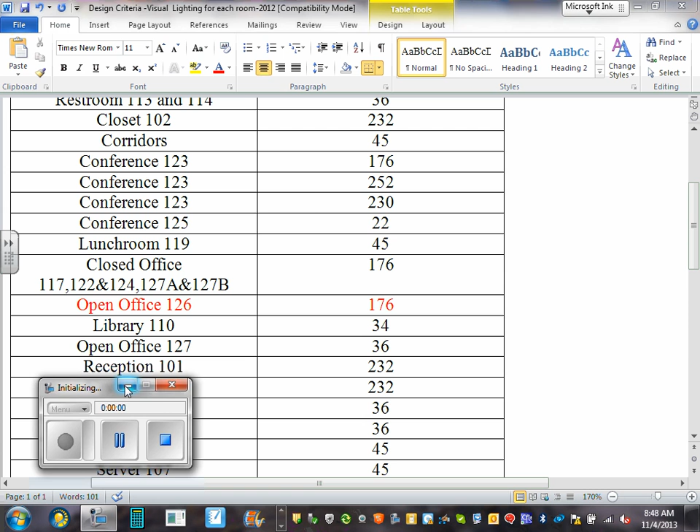Got that one. So here's the fixture. It's going to be page 176. We got that one. It's going to be a linear indirect light T5HO fluorescent.

Now, when you guys go to that fixture, here's what I just downloaded for you. Here's the fixture, that's from online. If you go online, you should be able to find Lithonia. If you go to the Lithonia website, Acuity Brands, if you go to Peerless, it's a Peerless fixture. If you look at the side here, Adam, right here, it's a Peerless fixture right on the side.

All the fixtures that we're using, guys, is from Acuity Brands. Here's the fixture. What does it do for living? Here's how it looks like. Can you guys see that?

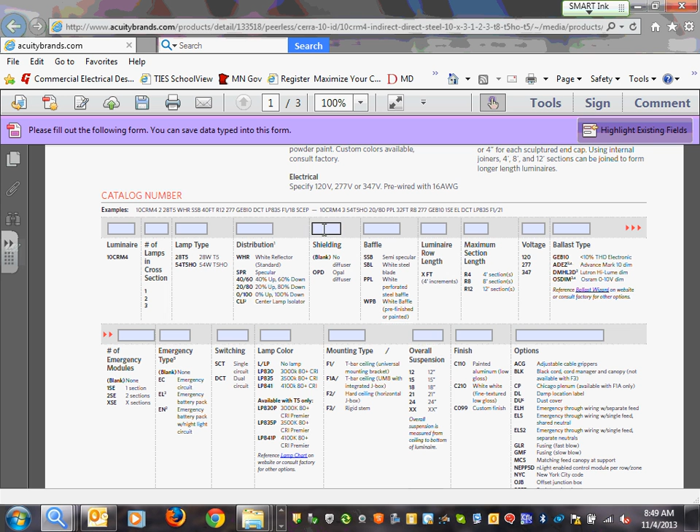It's direct indirect light we're going to be using. Here's the catalog number, how many lamps you can use in it. We're using a T5, can you guys see 28 T5 right here? Distribution, different distribution patterns and shields and what's not, voltages and what's not. You can pick the catalog number here for that particular fixture. But that's a fixture that we can use.

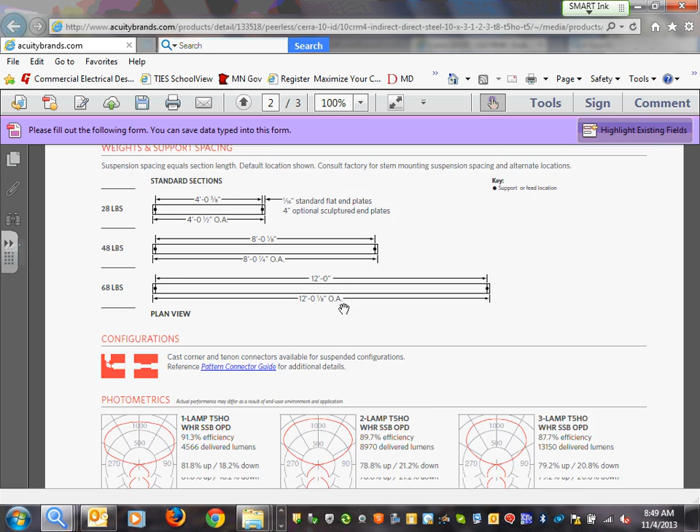You can have 4 feet, 8 foot and 12 feet. It looks like some of these fixtures, they come. Here's the distribution pattern. Matthew, remember just a second ago we were talking about the distribution patterns up and down. This is how this fixture, depending on how many lamps you guys use, shoots light up and down.

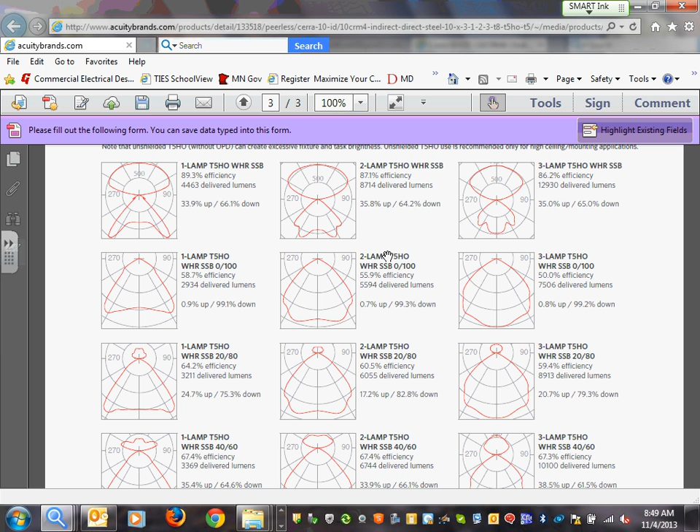Can you guys see that distribution pattern for this fixture? So when everything is done, you guys are supposed to print this one, make a hard copy for Chad, and put it in your portfolio. That's your cut sheet for your lighting fixture. So I just grabbed that one for you. They're so easy to find, all of them are in Lithonia. If you follow the book, it's so easy to find, guys.

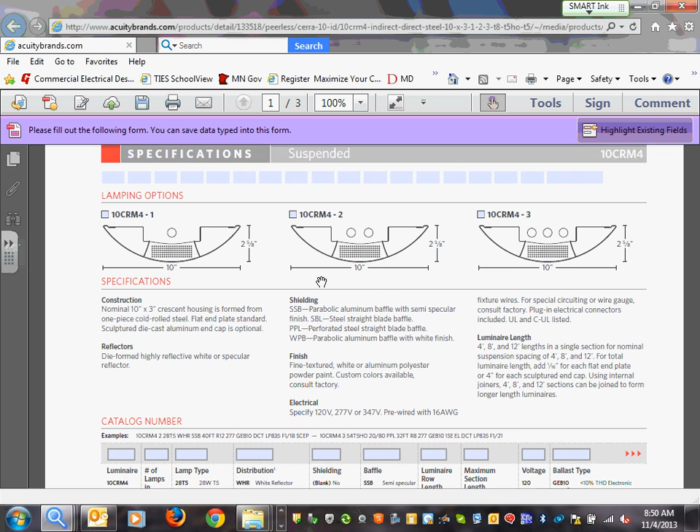Very, very easy. Okay, so let's go try to shoot for this one, guys. The example that they have is 10CRM4 and 28T5. Can you guys see that catalog number right here? Let's try to find that one in visual when we're looking for this light fixture.

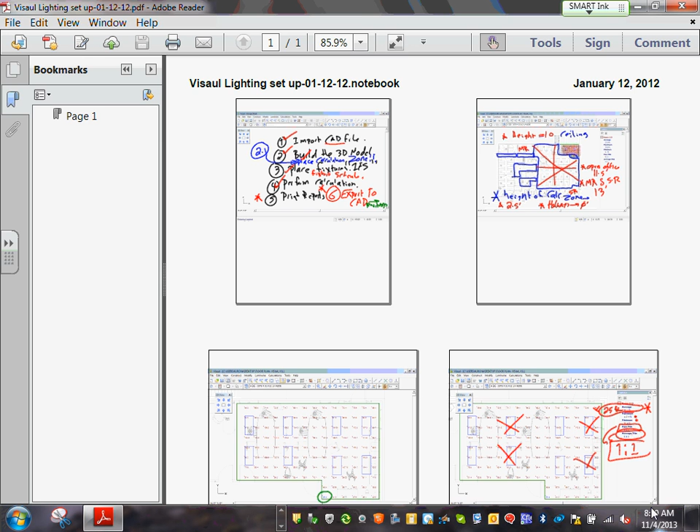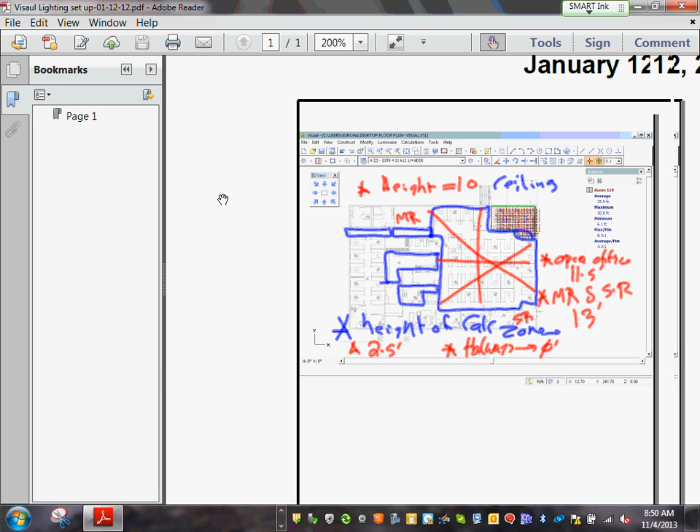Now, the last thing I want to tell you guys is the location that we're going to be using. Here's the open office area, gentlemen. Let's go put it at 200. Here's the open office area. This is how it's going to look like. This is the PDF. You guys have the PDF file.

Can you guys see how I'm going to track this open office area? That's how I'm going to track my open office area. All this is open office. The open office, the ceiling is...

11.5 feet ceiling, and I'm going to suspend it. So 11.5, if we suspend it at the open office, if we suspend it at 1.5 feet, let's put it at 1.5 feet, that will leave us a lighting fixture height of what? 10. Did you guys hear me? We're going to have a ceiling of 11.5 and a fixture height of 10.

Everybody knows why? Because these are suspended ceiling, suspended fixtures. They're direct and indirect light. Everybody can see, guys, how we're going to do that. So 11.5, keep this in mind, and 10.

All right, let's go directly into visual. Everybody's visual is open. Do me a favor, please, go open your visual and let's go do that.

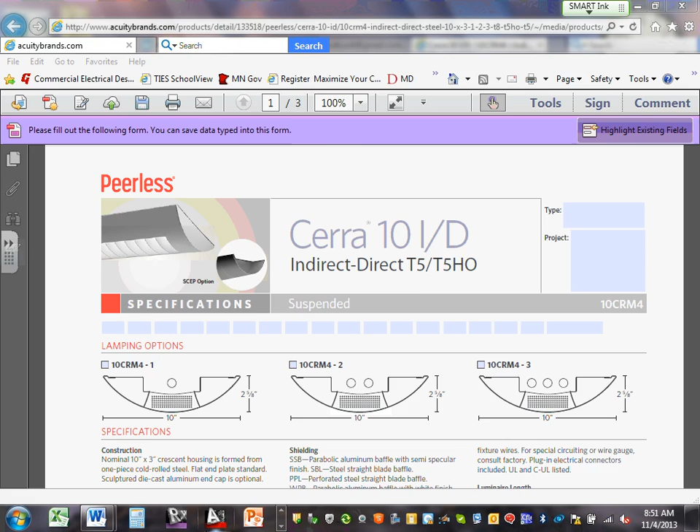One more time, any comments, guys? Any questions about what we're going to be doing? Any comments, any questions? So what I would like to do is go trace this open office. Can you guys give me a thumbs up when your open office is open? Karen, yours is done. Adam, you're open.

Okay, so what we're going to follow, so what I picked, the open office. We picked the lighting fixture. We're going to go draw the box, have a height for the box, and so forth.

Okay, let's go ahead, let's start with construct. Can you guys see where it says construct? Room, hit construct, hit room, non-rectangle. Everybody can see that? Everybody got that one? Karen, everybody good? We're going to construct non-rectangle.

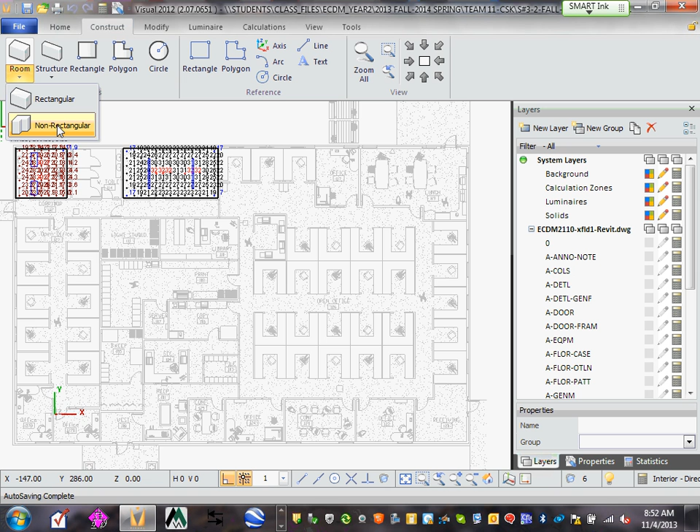Why non-rectangle? Do you see how the shape? That shape is ugly, man. So we're going to grab this. Everybody got that one, guys?

The first thing you need to name it, we're going to name it open office. What number was that? What was the number? Thank you, 126. Open office 126. Before you start, right underneath it, do you guys see what the default height is?

Derek, it's 10. We're going to do, now remember, this is the height of the ceiling. Now the height of the fixture, we're going to put it 11.5. So please change this one to 11.5.

Do you guys see the reflectance and what's not? We leave the reflection as is, ceiling reflectance, typical ceiling reflectance. If you know, otherwise you do it.

Okay, everybody's there. Can I have thumbs up? Everybody's good? Adam, good there? Yes, no? Karen? Okay, so can you guys see where the snap is here?

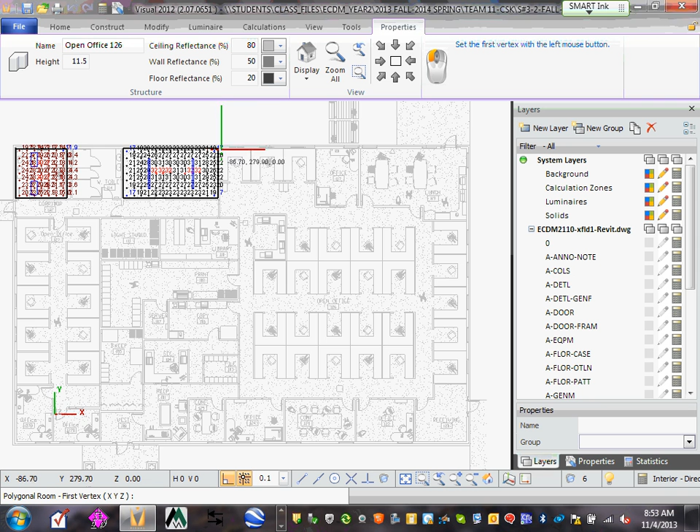Go get your snap as small as you can right here, so you can zoom into it. And you're going to start from this corner, basically. Can you guys see where I started with this corner? It doesn't matter if you, and basically trace it.

Can you guys see how I'm tracing the open office area? Everybody can see that? I'm tracing my open office area all the way here, here. When you guys are done, let me know. You might be faster than me.

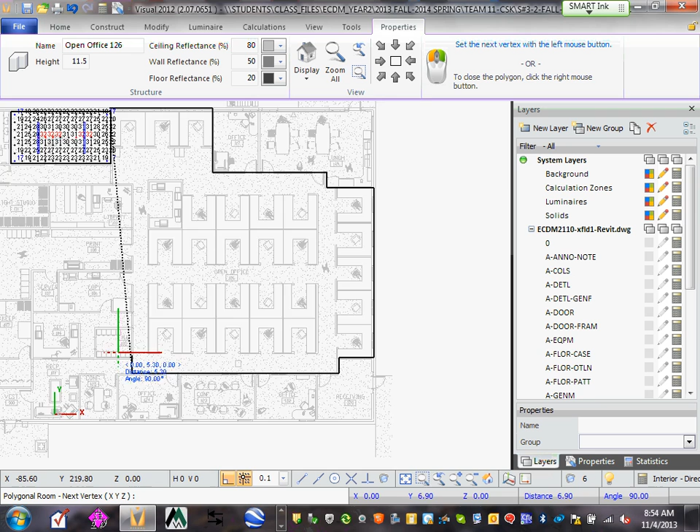Okay, so I'm tracing the whole open office area. And don't sweat it too hard if you overlap with some little furniture and what's not where. And right click. When you're done, right click.

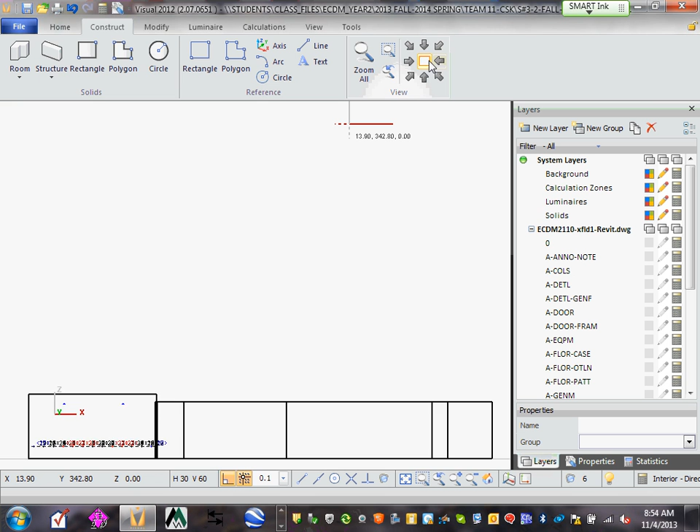I must have used, I hate this, structural, construct. Okay.

Any comments, guys? Everybody's there? Right? Did you guys build it? Can you guys look at it when you're done? Give me a thumbs up when you're done, please, with that constructing it.

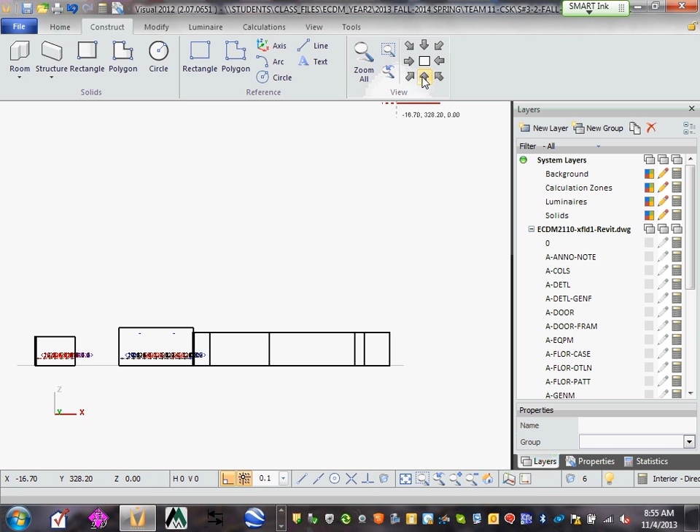Yes, no? Adam, did it work for you? Okay. Did it? Okay, continue with the other one then. If you did it, continue with the other one. So, okay, so that's your fixture. Matthew, good? Okay. Now let's go, guys, to the other one.

Now zoom it on it this way and go to calculation. Go to calculation, calculation. We need to go calculation by surface. Can you guys see that? You need a surface calculation by, I'm sorry, not calculation zone. Make sure you go to calculation zone, calculation by surface. Everybody's there? Yes, no? Click on that one.

Now I would like you guys to name this one the same thing, Open Office. Open Office 126. And the height right now is sitting at 0. Do me a favor, change the height to 2.5. If any of these heights are not right, guys, I would not accept your project if it's a different height.

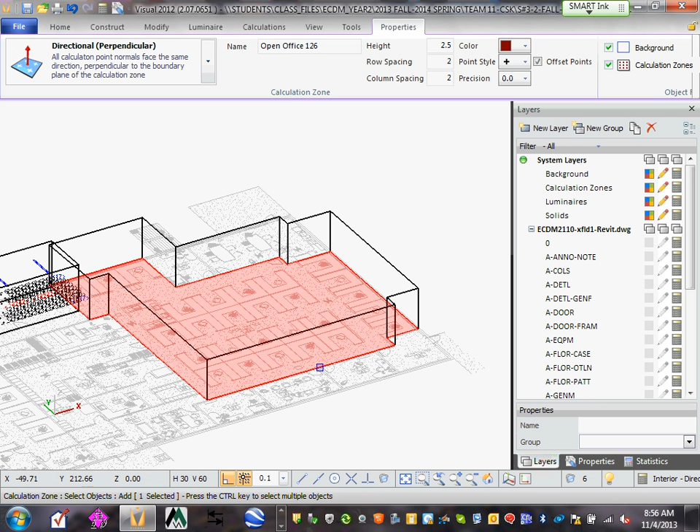And then go touch the bottom. Can you guys see the bottom here? Now you can see it will create a calculation zone 2.5 feet off the floor. And right click, and ladies and gentlemen, you have just calculated. Can you guys see your calculation zone?

Can you guys, Adam, you're done. Karen, Derek, can you guys give me a thumbs up when you're there? Matthew, good. You guys are ahead of me. So if you're ahead of me, please jump into the other fixture and start doing it. Okay, so that's it. So we got the calculation zone, guys.

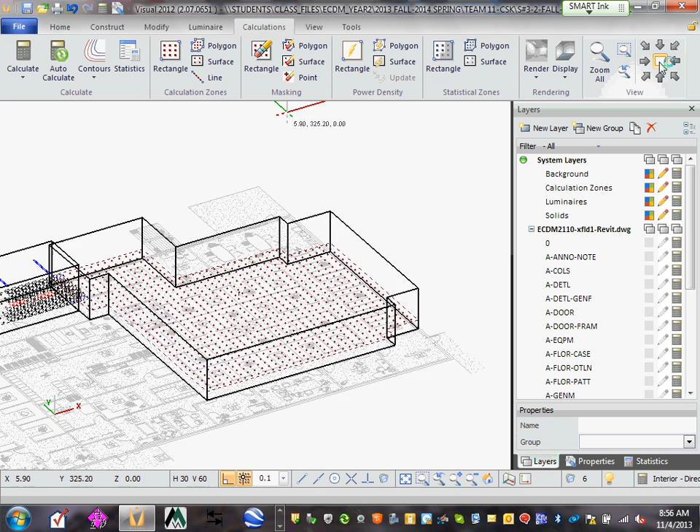Now we need to go place our fixture. We're going to go place our fixture. So let's go to the lighting fixture. When we place fixture, go to Luminaire.

Schedule. Click on the schedule. And a new, can you guys see that new fixture? We need a new fixture. When you guys go to new fixture, I hope you downloaded this one.

Did you guys download Peerless Lighting? Is Peerless Lighting downloaded for you? Peerless Lighting, yes? Okay. Now let's go. How do I know it's Peerless? The question would be, how do I know Peerless?

Karen, can you guys see here? The side, it says Peerless Lighting. That's what's going to decide which type of fixture is going to go. Okay, so let's go to Peerless.

And what type of fixture? It's called pendant. So here, see, actually it's CR7. Can you guys see it right here? Peerless Cerra 7. Here's a fixture. And I need indirect, so I have indirect light, partial, CR7, any wall. Here's my option. Let's use indirect lighting fixture.

CR7, 1. Do I see a CR7? Anybody see a CR7? 7, 1. Let me see if this one. 3, partially indirect. Okay, let's use this one. Okay, partial perforation. This looks like partial that give us direct indirect one.

How do I know that, guys? If you look at this 7, it says 7CRM2, gives you indirect light.

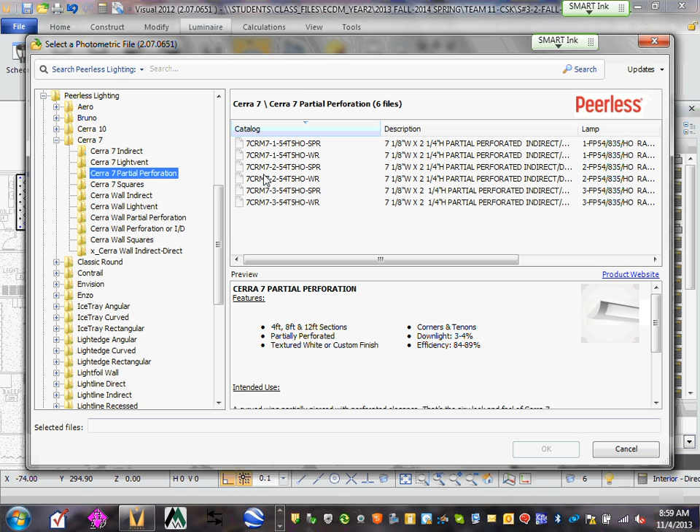Yeah, let's use it. Okay, so it looks like this is direct indirect. Can you see that, guys? Everybody got that? Any one of these at this point would get you there.

So do me a favor, I'm going to go to T5. Okay, let's go to T5HO. Here's a fixture, here's one of these fixtures. Let's see what that fixture has in it.

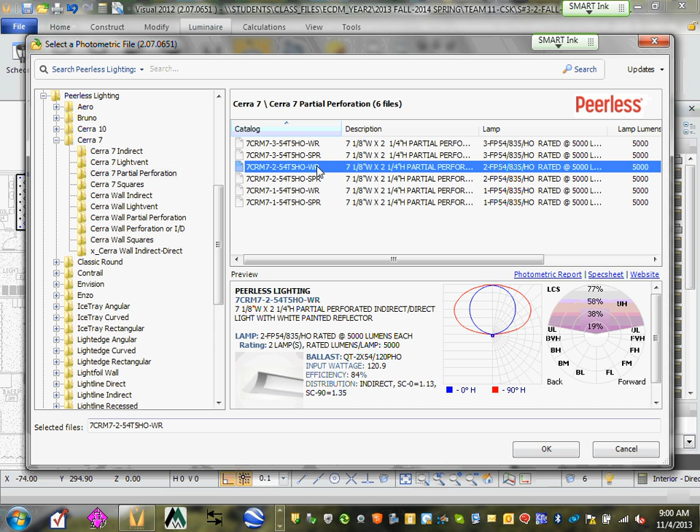Everybody got that? Shall we? Okay, double click on it. Let's go use this one. So here's the fixture that came with us - it's Peerless, it's named D now. So if it's going to be different in your plans, guys, you can go ahead and rename it differently.

Can you guys see the loss factor? Let's go put the loss factor at 0.82. Everybody can see that? 0.82, the loss factor for that fixture, and it's fixture D, Peerless light. We use 7CRM2, 254 T5, so 2 bulbs, 54 watt, I believe, each at T5.

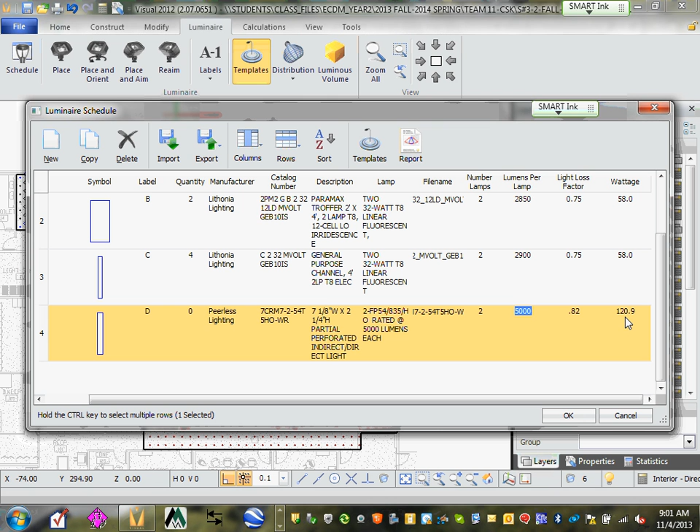T5, the bulb is so small, guys - it gives you a lot of light. So here's the fixture that you're using, it's 2 fluorescent, 54 watt, not all the information shown. 2 lamps. Can I have thumbs up, fully? Look at the watts - how many watts is this taking? They're eating 120 watt. Cool, everybody's good with that? Okay.

Now we have a fixture. Now let's go place the fixture, guys. Place - when you hit place, it defaults you to this lighting fixture that you just installed. Can you guys see that? It defaults you to - everybody hit one more time. Hit place. Cool, hit place, here's your fixtures that you have.

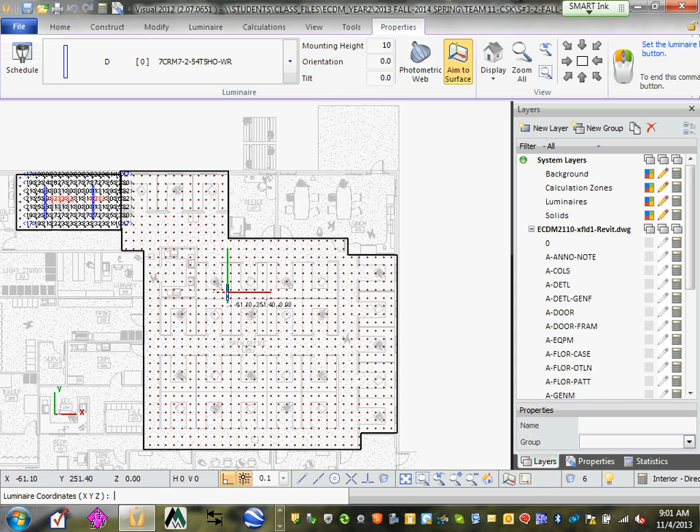I want you guys to default to this fixture. Now I'm holding that fixture in my hand, so I can orient it. Let's go orient it to 180. See what 180 will give me. Oops, 180 - alright, so I don't want to do that.

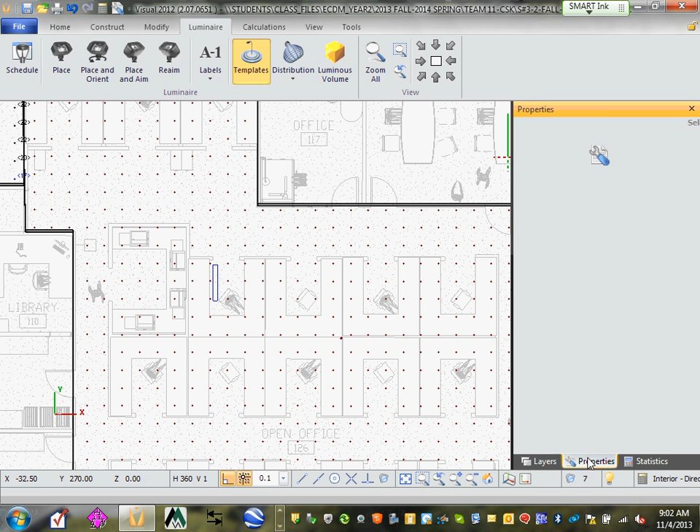Okay, I made a mistake with that one. Take property - click on property, go here, click on it. Made a mistake, guys - right click, property, pick it up. Where's my delete function? Hit delete, I guess. Home, delete. Right click, here you go.

So one more time, go to Luminaire, click on your fixture. At the height - can you guys do me a favor? The height is 10, it comes at 10. And I'm going to go put this one to 0 like I did, and this, and then try. They're sitting at 10 - let's try to build a system right in here.

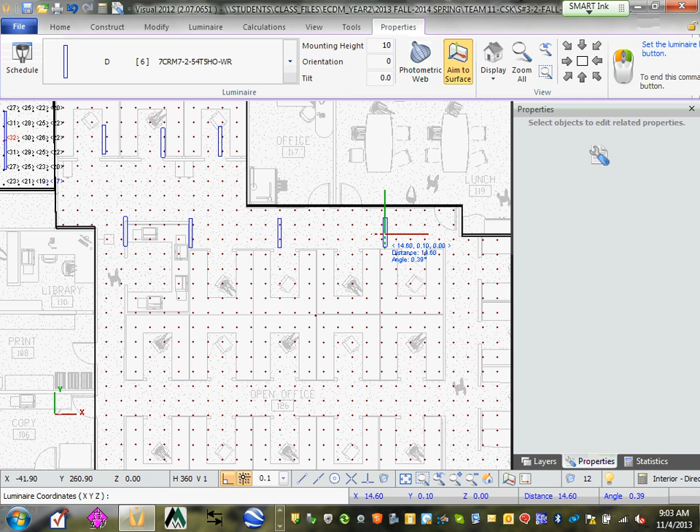So you need to place your fixture. Here's one fixture here, and what you can do is either place them like this, guys, or you can just copy them. I'm just placing them right now, which is not a good idea because then you can't evenly space them. So you can just drop them here, and then here's my fixtures.

Then you can copy them - home, you can start copy. Where's my copy function? Move copy, here's my copy function. You can copy that fixture at, can you see, at whatever, at 5 feet, every 5 feet. Here you go, it gives you every 5 feet, for example, when you hit your copy.

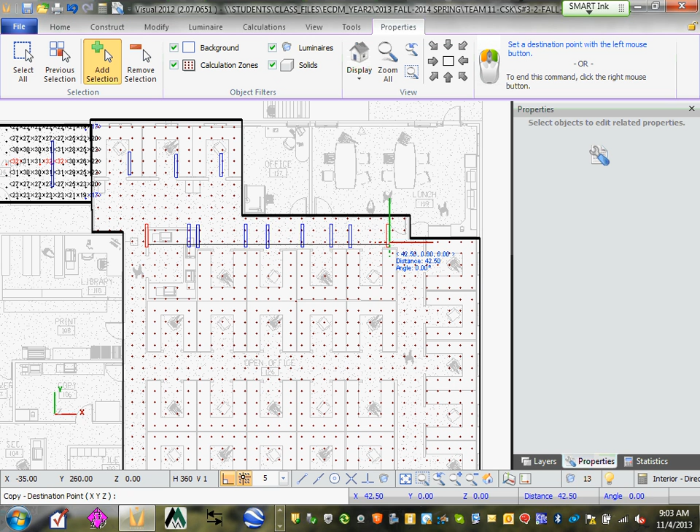And I'm going to go down here and copy them, so that's where you can build your system. And this is really the hardest one to do. Okay, hit escape, and then you can, like you said, you can - I drop these.

10, the fixtures are 10. I want to go delete the ones that I put randomly here. I think that was one of them, and that was - I think that was one of them. Now I got that one of them.

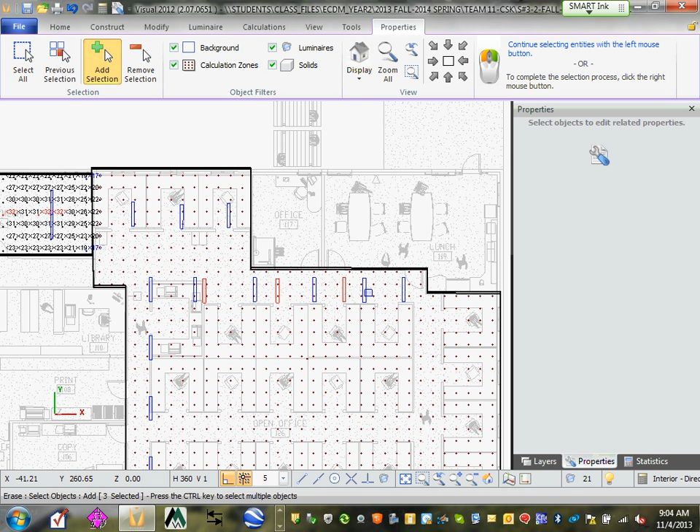Okay, so delete, then you place your fixture. The best way to place your fixture, Karen, is to drop one and copy it. When you're done, look at the calculation zone, hit calculate, and off it goes with your calculation. Here's your open office, right now I'm sitting at an average of 14.1. Obviously I need 40. Do you see how easy that is?

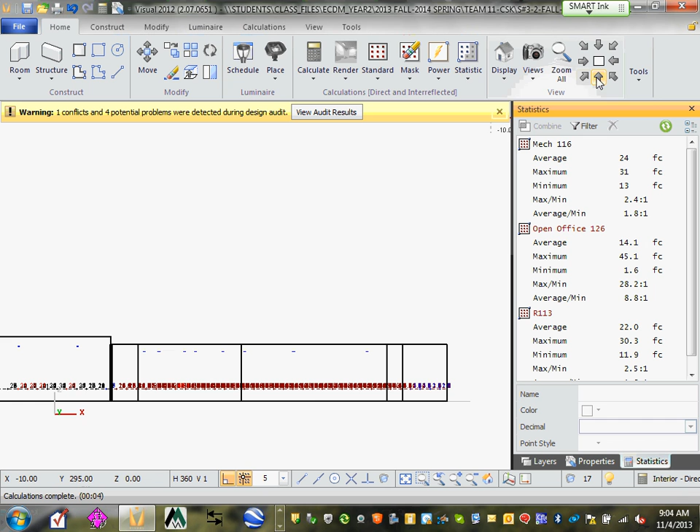Now, to make sure your fixture is in the right location, guys, look at it always in 3D. Matthew, can you see how your fixtures are suspended right here? As they should be. Any comments, guys? Any questions?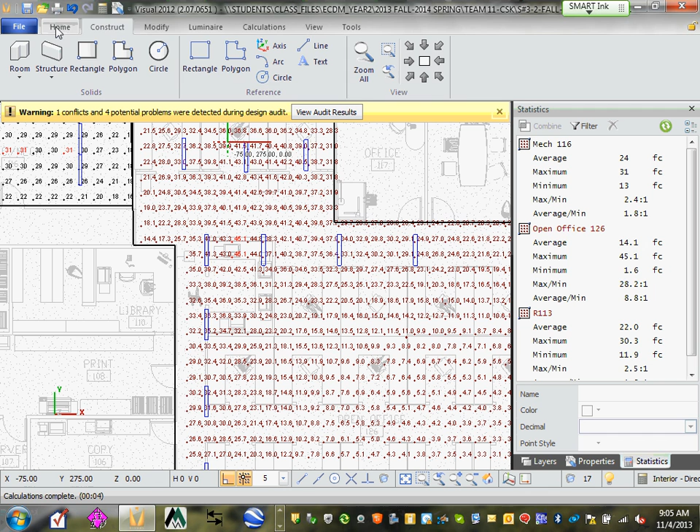Like I said, I would suggest, guys, when you drop one or two of them and do your calculation, you can go to Home, Modify, use the copy function, click on any one of them and copy them. That will drop them at different locations from where they should be. There you go, they're sitting at 5. So you can copy them at a certain location and then recalculate.

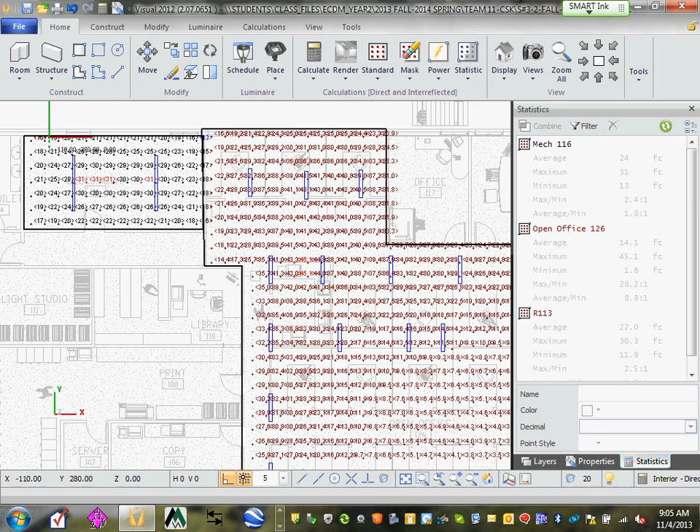Now for you guys, the most important thing: don't drop them randomly. Drop one and copy it vertically so they line up. You see how we did this one, guys? How we line them up. Make sure you do the calculation, copy them, and drop them - first drop, then copy so they can line up. Always calculate, and when you calculate it will populate.

Look at that, we're at 18, and I'm not even there yet. Any comments, guys? Any questions? This particular fixture, Karen, is actually...

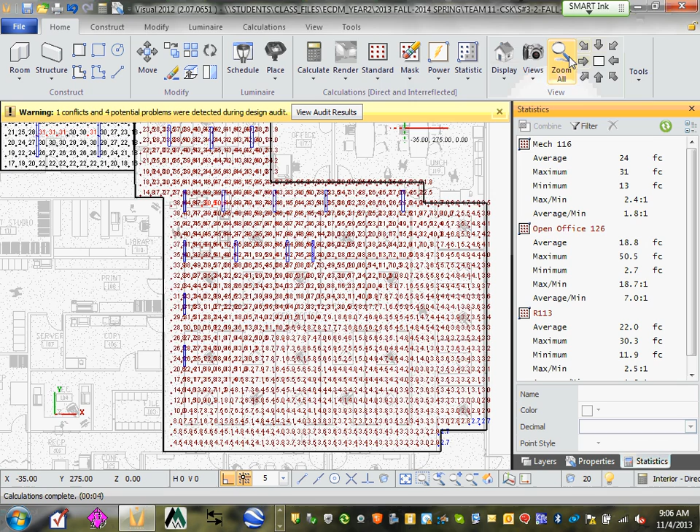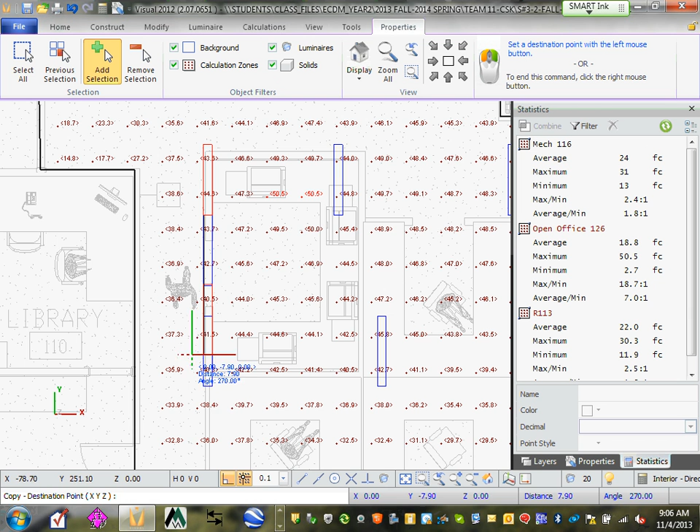This particular fixture can be done back to back. So you can copy this one if you so decided, right click and set this one at 0. You can see that you can copy them right here, make a line out of them - I'm just dumping fixtures over fixtures and what's not. So you might get a better performance.

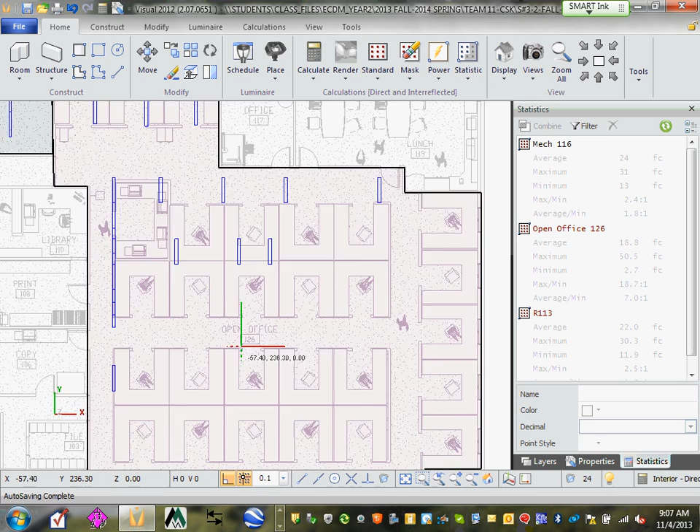Can I get your attention for a second here? You might get a better performance if you line them up, guys, end to end like these. End to end - you can get a better performance if you line them up end to end. Any comments, guys? Any questions?

The question would be where to start first. This is really the hardest one to start with, this particular one. But if you want to line them up vertical or horizontal, guys, make a line starting from here all the way - here's line 1, line 2, line 3, line 4, to wherever. See what I mean? Line them up this way, and you might have to throw a fixture here or what's not. Here's one way of doing it.

Line them up - when I say line them up end to end, you put fixture end to end and make a line. Do you guys hear me? Then run your calculation. I need a thumbs up, Chad - do we have enough information to run our lighting calculation? From Adam? Yes, no? Okay. Derek, enough info with monkeying around? I'll be around, Karen, does it make sense?

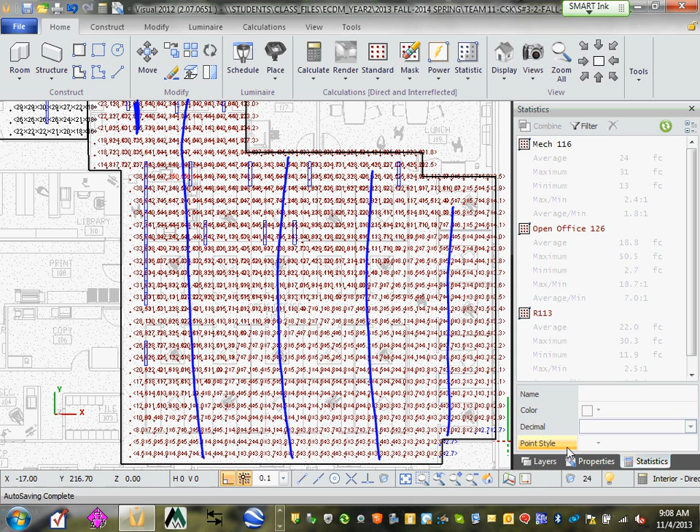Okay, the science of dropping your fixture, guys - if it's an odd shaped room like this, I threw these three here. Typically when we place lighting fixtures in a room, which we're coming to next chapter: if you have a room, you put one fixture right in the middle. Did you guys hear me? If you have two fixtures, space them evenly inside the room. If you have three fixtures, the same thing, space them evenly. That's the best way of getting the best performance from your fixture.

We're going to be doing calculations, let you guys putz around with them and drop them so forth, so we can adjust them. Any comments, guys? Any questions? The rest of the spaces, every other space, you just draw the box or the room, put the calculation zone, guys, and do your calculation.

I want to remind you guys of a couple of rules if you forgot from last week. When you drop them, the height of the ceiling is 10 everywhere except the open office at 11 and a half. Mechanical room and shipping room is 13. In the mechanical room and shipping room, Adam and Brian, my friends, we will be suspending them at 1.5 to 2 feet, suspended light fixture. Any comments, guys? Any questions?

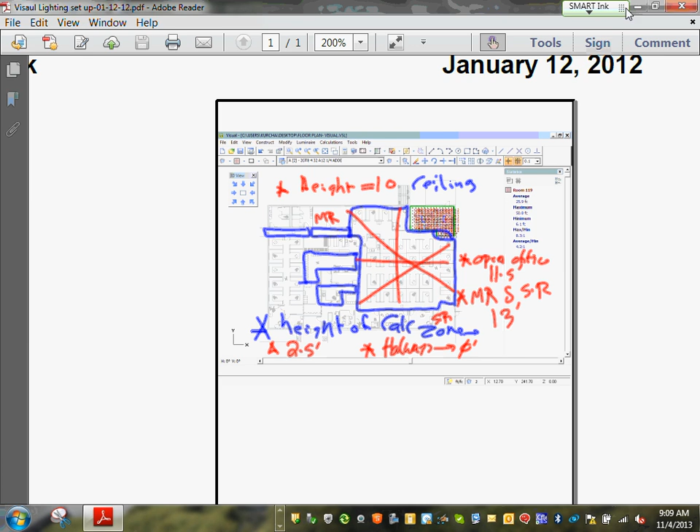Okay, shall we be able to run with it, guys? Yes, no? Okay, thank you.